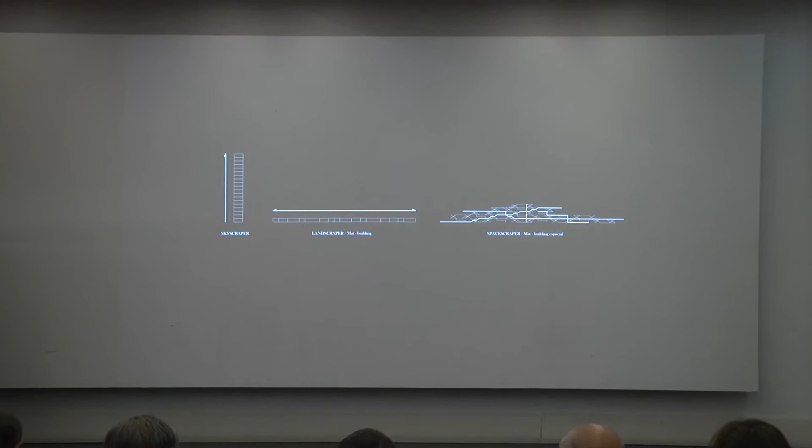But these patterns work only in one level, so how could we translate this concept, taking advantage of the 3 dimensions of space? The most important thing is relations, and it is the system itself which determines the rules of the game. The interconnections are multiplied, and the speed of mobility improved. The project is a research about this typology, a spatial mat building. Its base is a unique piece capable of generating the whole system, and which encloses all growing possibilities. As in a system, it is necessary to define the rules that allow its development.

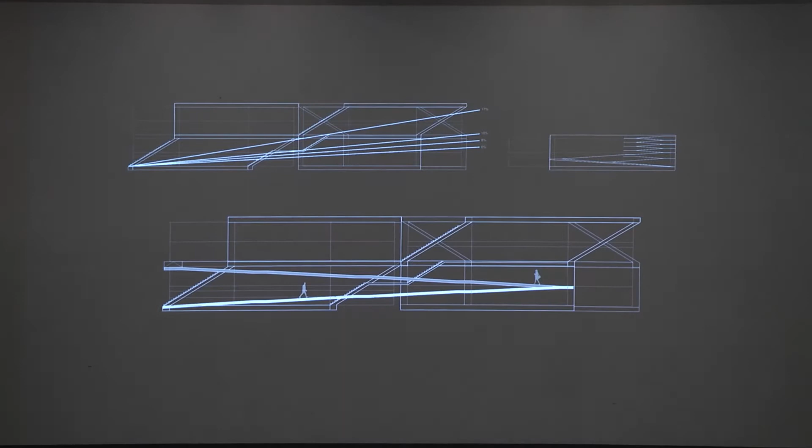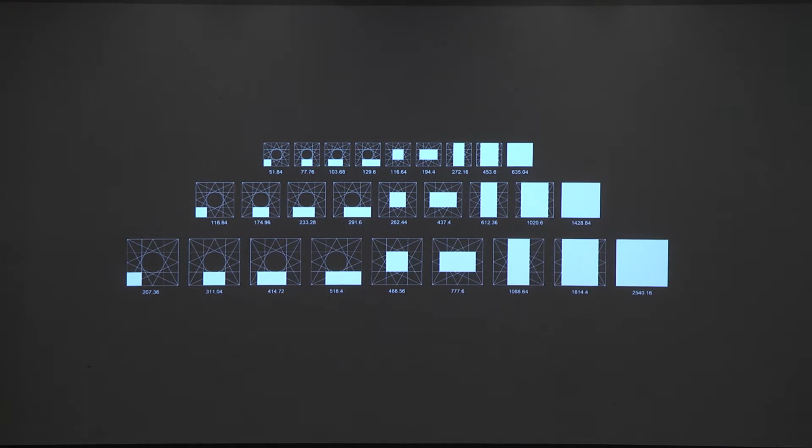So I studied and learned about aggregations, about geometry and patterns and superpositions. I learned about light and shadows, about dimensions and proportions, about the connections between 2 consecutive spaces, slopes, and accessibility for anyone, the possible scales, and the occupation areas, which are adaptable for any kind of program. But all these aspects merge in the final spatial system. But of course, it has to be something we can build.

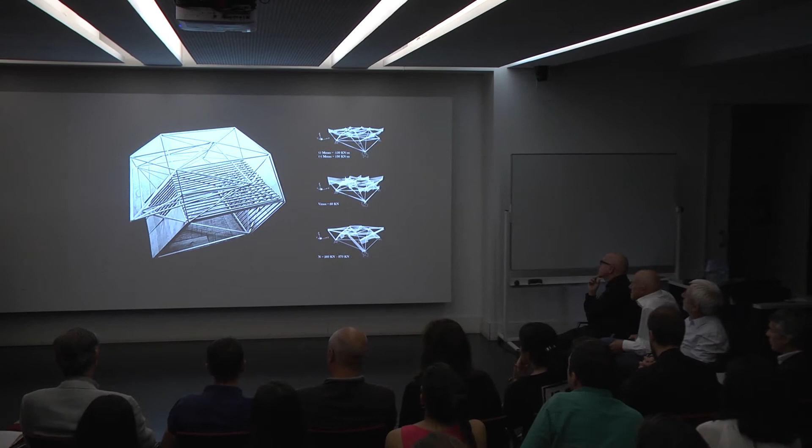The structure and the entire materialization is made of empty steel walls. Each point is tied in the 3 dimensions, in at least 3 different directions, making the set completely stable. The section of the beams is adaptable to any distance and load, maintaining the proportions because of the geometry. The building process is designed to guarantee stability along every phase of construction. And we can use the steel as a transmitter and emitter of thermal energy by heated water and sun, reducing the number of machines, installations, and the energy resources needed.

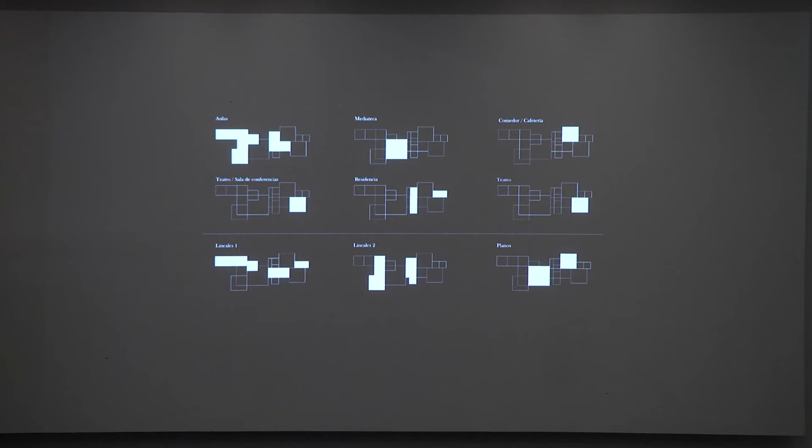And going back to Hunstanton, the project is located in the same plot as the Smithdon High School of Alison and Peter Smithson. It maintains the open space in front of the school, while creating a new shape in the landscape. The university campus is based on constant exchanges of information, and there are many ways of communicating it, very linked to arts and architecture. So we have, for example, paintings, photographs, musical pieces, and of course plans, models, or even a presentation.

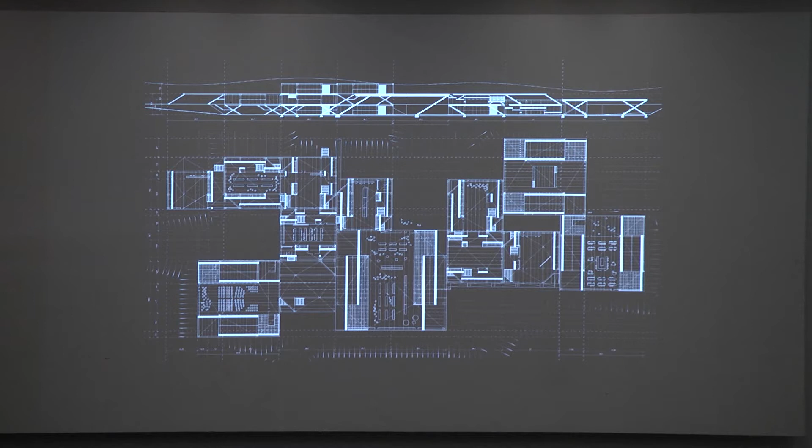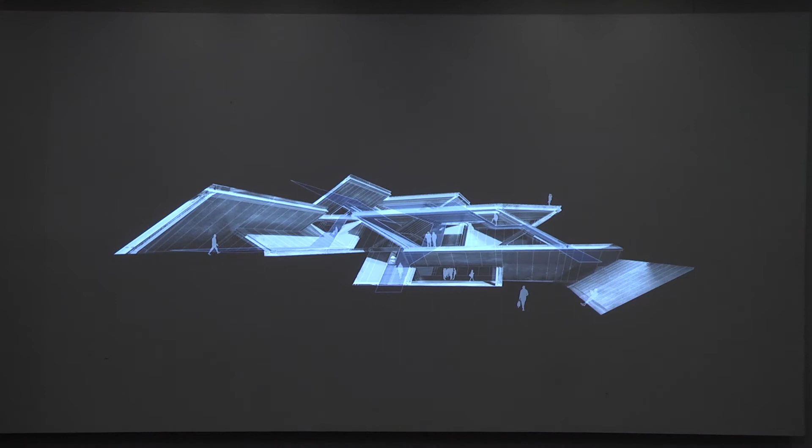But how is this space lived? Very simple. It is about translating those exchanges of information to the space it occupies. So, for example, according to the system itself, there are many ways to move around this space. You can do it linearly, and you will get linear information. Then you will be in a conference or in a professor's lesson or reading a book in a library.

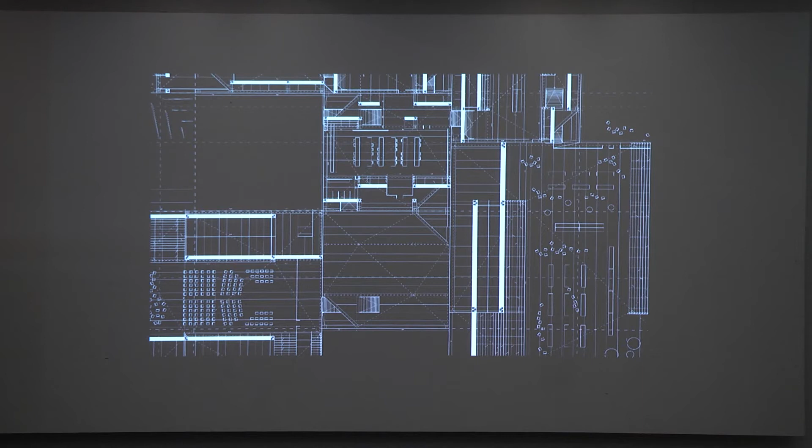Also, there are spaces with many possible directions, and they serve as singular points of reference within the set. So there, you will be in a discussion, in a workshop with colleagues, or in a media library, receiving information from many ways. But you're free. You're free to go around in any direction. So the type of information that you get, it's up to you. You are the one who connects those different programs and spaces according to your own interests.

The environment is green, infinite, and extends up the hills, and the versatility of the system allows meeting the many requirements of the program at the same time that it maintains the horizontality of the surroundings, so it accompanies the silhouette of the hills. It respects the height and the scale of the Smithsons' school, becoming a part of the landscape. Thank you very much.

I feel very self-conscious seeing something for a few minutes and then responding to it. I think it's fantastic, really, hugely impressive. I love the way that it's a new way of looking at movement, and the movement really generating the spaces and the whole three-dimensionality of that.

If I had the opportunity perhaps for a more intimate exchange one-to-one, I'd comment that I enjoy very much the way that the staircases and the kind of auditoria share a similar geometry. I'd love to know how a ramp system, for example, might interweave into that, so that in parallel you address the whole disability thing without use of elevators, without use of lifts.

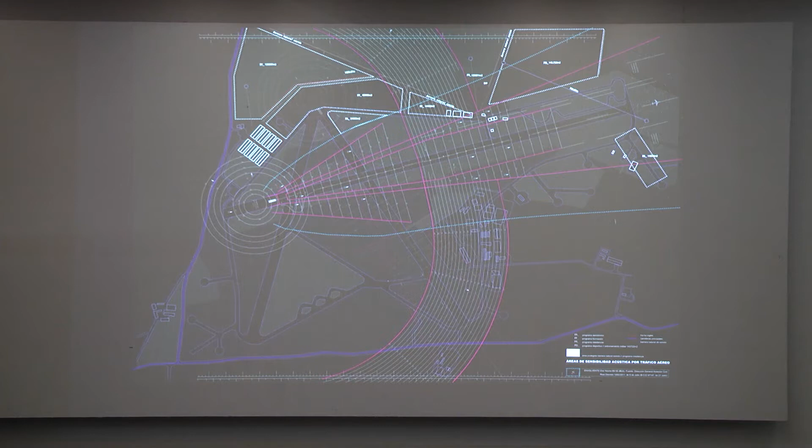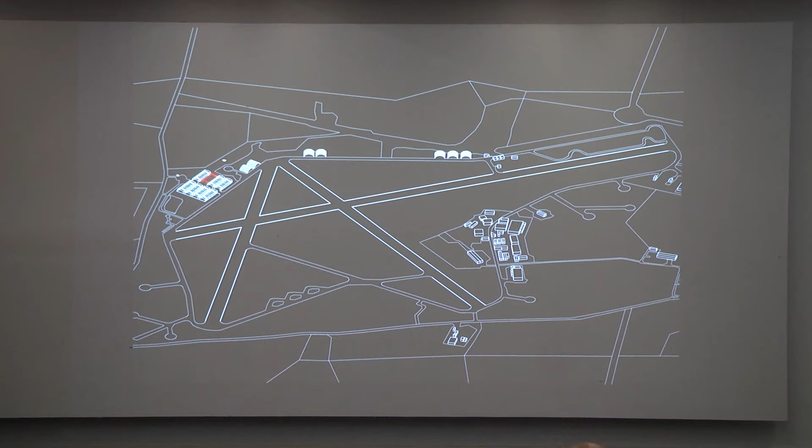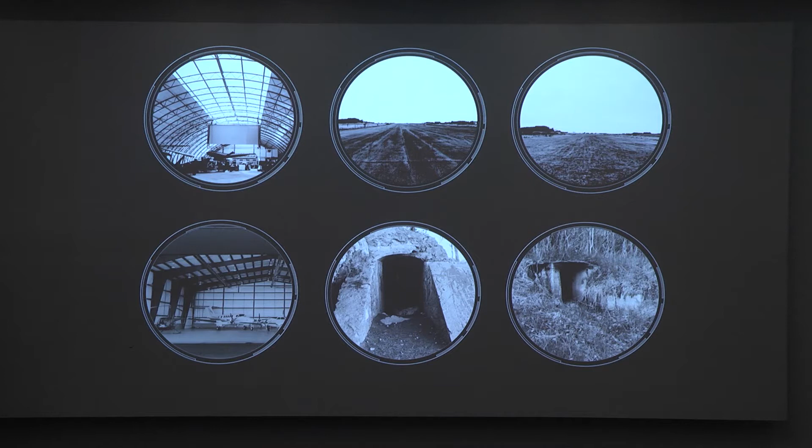The aerodrome, in its current state, is organized around three airstrips. In the western edge, we find 8 hangars of metallic structure, distributed in a row, and 2 entrances to some old bunkers. These pre-existing structures are completed with another type of hangar, located along the access road. The dimension of the airstrips gives a character to the landscape, being especially attractive the simultaneous existence of 2 so different types of construction, the hangar and the bunkers, that generate a strong contrast.

I made the decision to limit my intervention in the West precisely because of the coexistence of these 2 typologies. One of the naves cannot be used for its state of ruin, and that's why I decided to do without it. In the first hangar, located in the west, a camping area is established, followed by a zone for training and sport use. Close to the runways, there are the drone training and control tower.

In front of it, a mechanical workshop hangar. Looking to its left, a hangar for teaching use. In the footprint of the hangar in ruins, a meeting area, and to its left, a hangar for logistics and administration. Underground, the 2 entrances of the pre-existing bunkers are connected, and a rack and data storage rooms are established. In addition, 4 new entrances are created in the hangars with greater influx of people.

There is a double strategy when addressing the materialization of the project. The first of them is a minor order system that connects to the porticos of the pre-existing hangars, a system of catalog scaffolding that provides flexibility and a possible reorganization in time, adapting to the changing necessities of a military program.

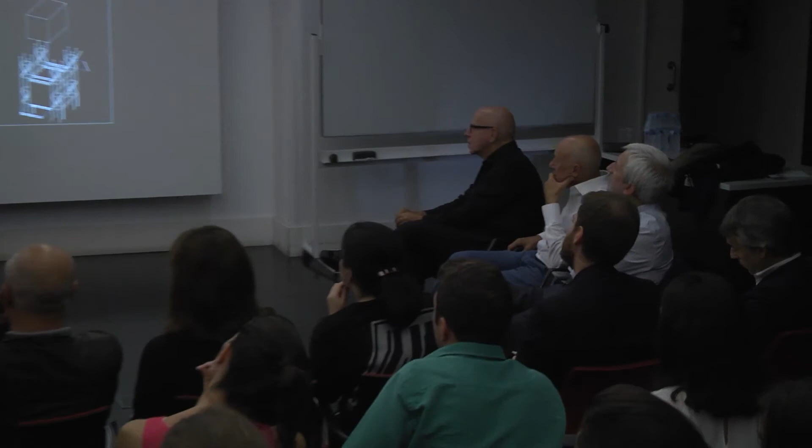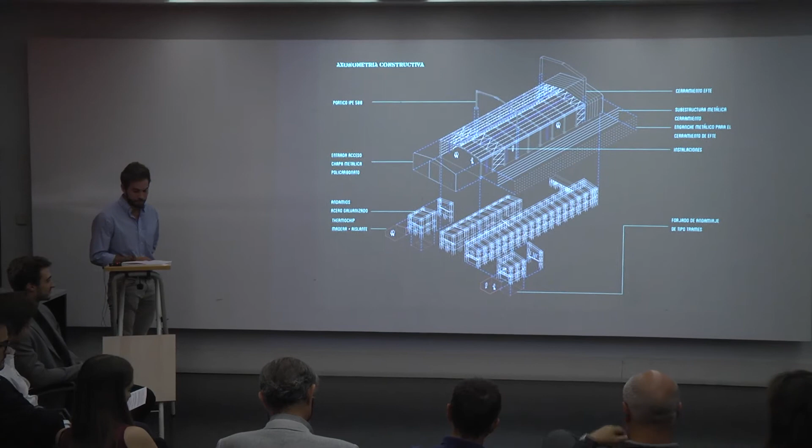The second strategy focuses on the resolution of the underground bunkers by very thick concrete vaults, necessary as a shelter in case of emergency. Each one of these elements is constructively defined. The system, which could seem repetitive, allows the communication between programs. The combination of the pre-existing hangars together with the new system generates an attractive composition.

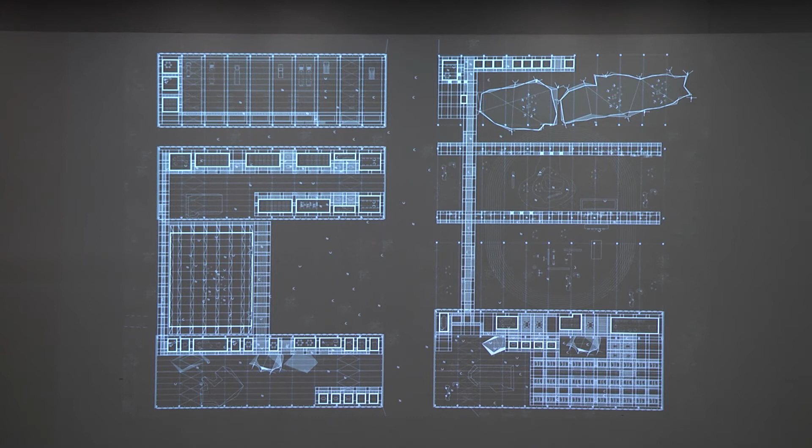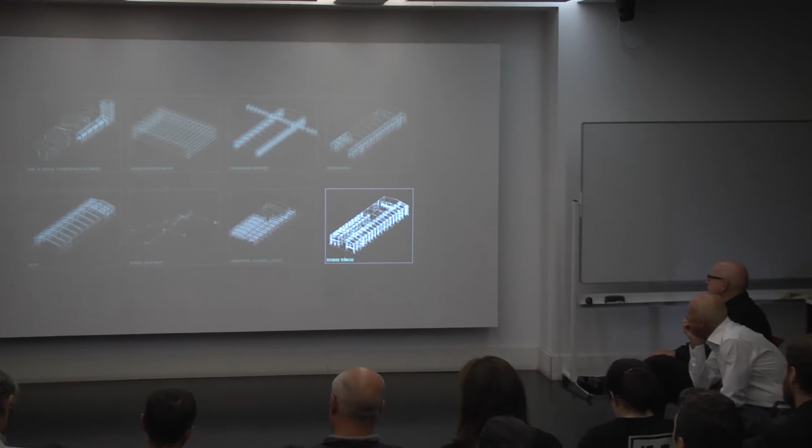In the drone training area, I introduced a self-constructed system consisting of tensors and micro-perforated meshes. In the teaching area, some prefabricated wood volumes are introduced, adapting to the system of scaffolding. They provide a central gallery. In the camp hangar, the residential use is simplified to bunk beds due to its military character.

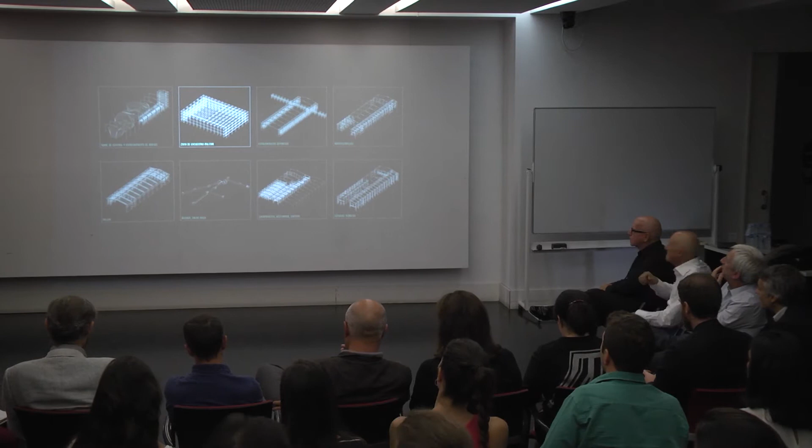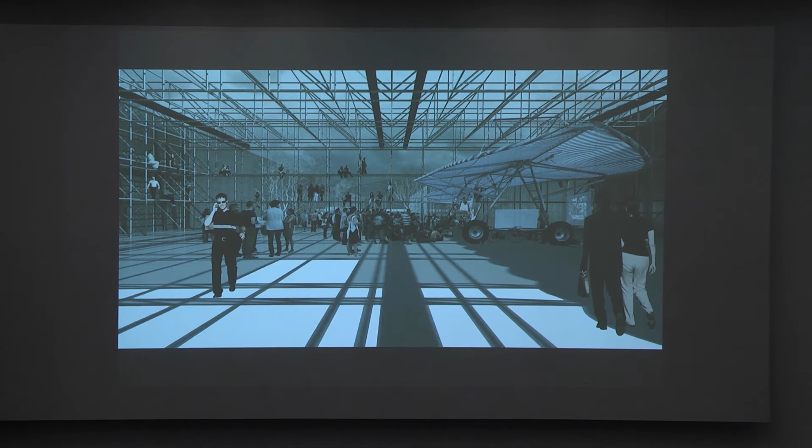Up to this point, all the spans saved by the scaffolds were previously known because they were cataloged. Here, the structural challenge appears. I decided to design a large common space. I needed to save a 25 meters span using the same scaffolding system. I studied how and where the system had to be reinforced, providing a solution that could host a place for events and conferences.

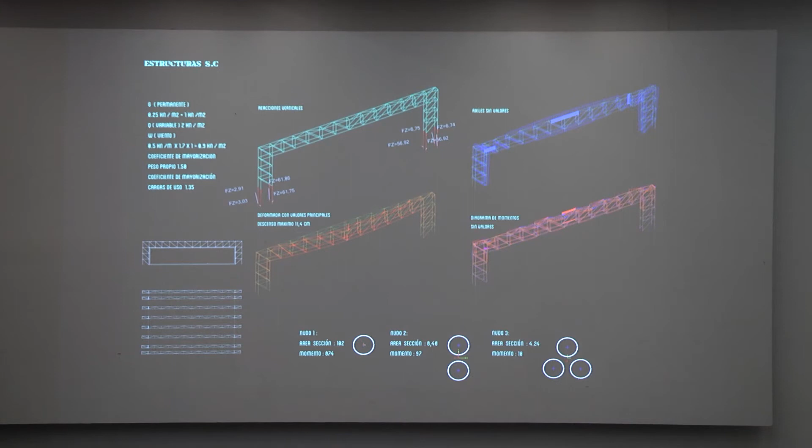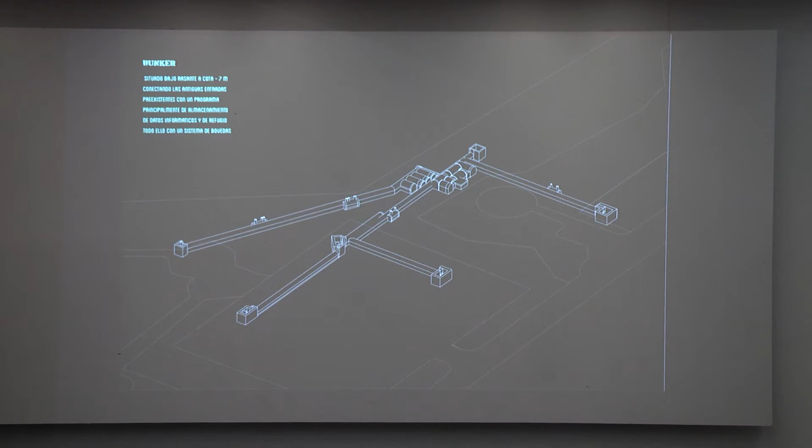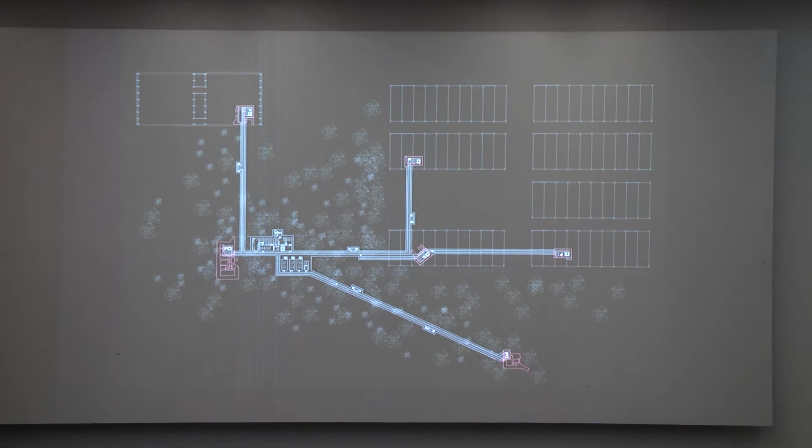Finally, the underground construction. The two pre-existing bunker entrances are connected, and the structure now protects a refuge and a data storage room. Another 4 new accesses are also strategically located. The two pre-existing accesses are hidden among the vegetation, recovering the purpose for which they were designed. The other 4 are located in areas where the largest number of people are concentrated, achieving a rapid and agile response for shelter in case of emergency.

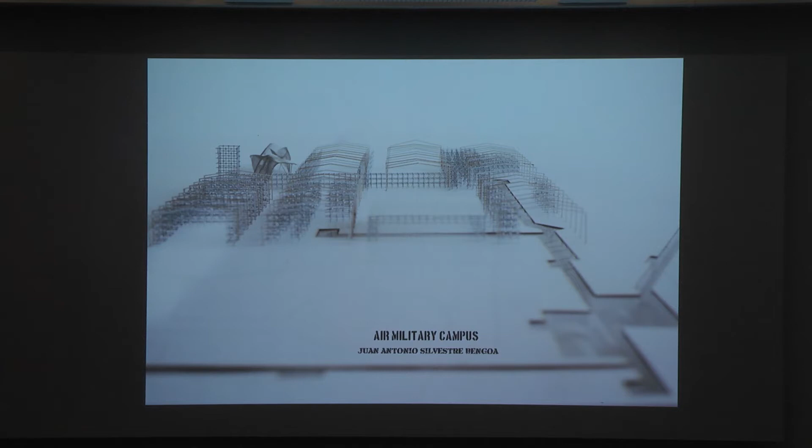An architectural project that started from personal interest and that is able to detect the appropriate place to carry those interests out, and together with the technique manages to materialize an idea. Thank you very much.

I don't think I need a microphone in there. Well, it's for the... Really? Oh, okay. All right. It's not for the audience.

As you know, I have a love of aviation, and I think military airfields, especially abandoned airfields, have an extraordinary kind of impregnation and layers of history. So I enjoy very much the way in which you engage with the heritage aspects of a base to transform that into a new kind of military education complex, which is very much against fashion.

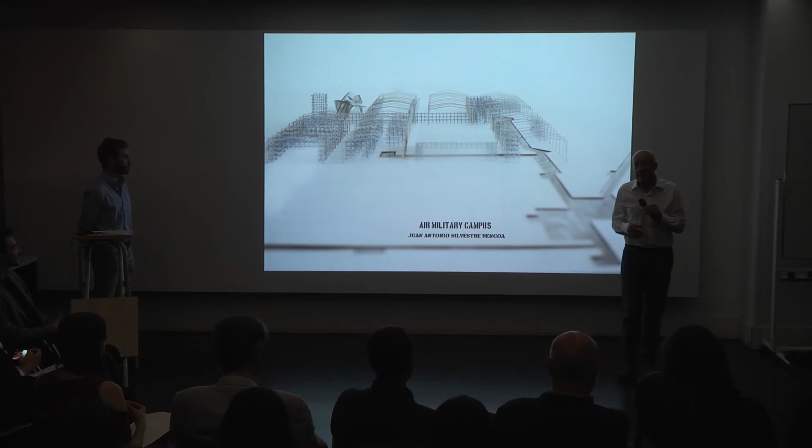But I think it's an inspiring synergy of the old and the new, and how you've been inspired in terms of the new structures by the kind of anonymous architecture of hangars and the reuse of bunkers. I think it's a super scheme, so congratulations. Really enjoyed it.

We're going to move to the center of London. We're going to see 2 exercises in a row. Sonia and Ricardo. Good morning. My name is Sonia Prieto, and it's a pleasure to be here. My project is in London, Smithfield Market.

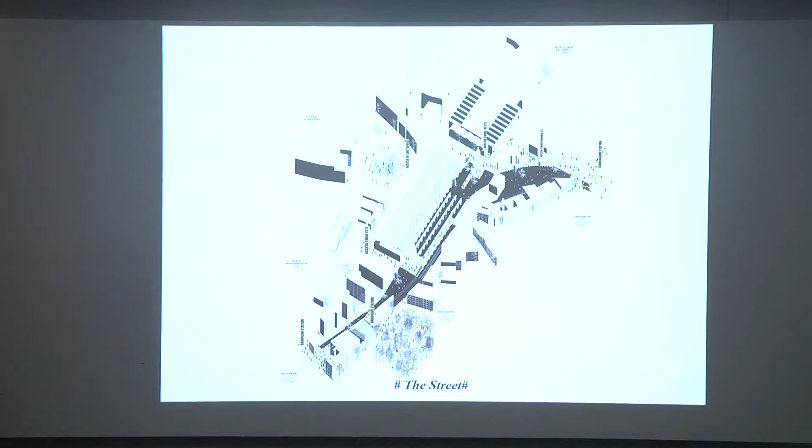In the middle of the City of London, Smithfield Market is an opportunity to convert the university into a way to make city. We got used to hide infrastructures deep underground, making a disconnected, dark and restricted urban world. This project proposed the opposite solution, taking advantage of this place, designing the campus as an infrastructure in London, allowing it to connect to the city and revealing underground architecture.

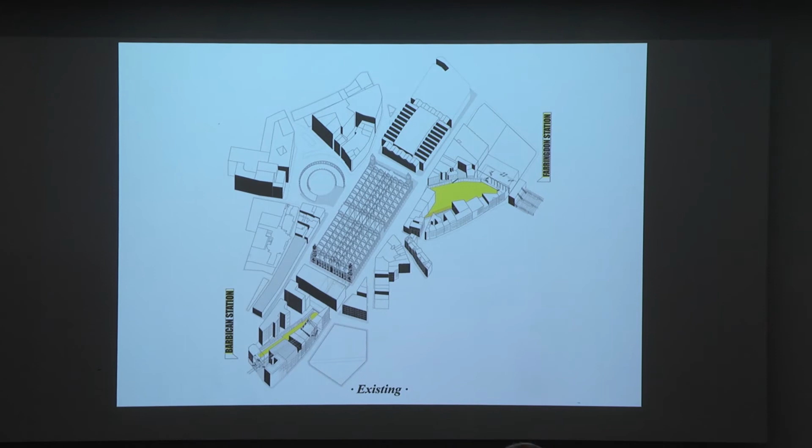The project starts with the location of Barbican and Farringdon Station, both open cast and so close to the market that the railways cross its basement. Beams from the North Street are eliminated, disclosing big retaining walls, brick arcades, past century barrel vaults, and the punctual and rhythmic trains that create new public space at the university, the street campus.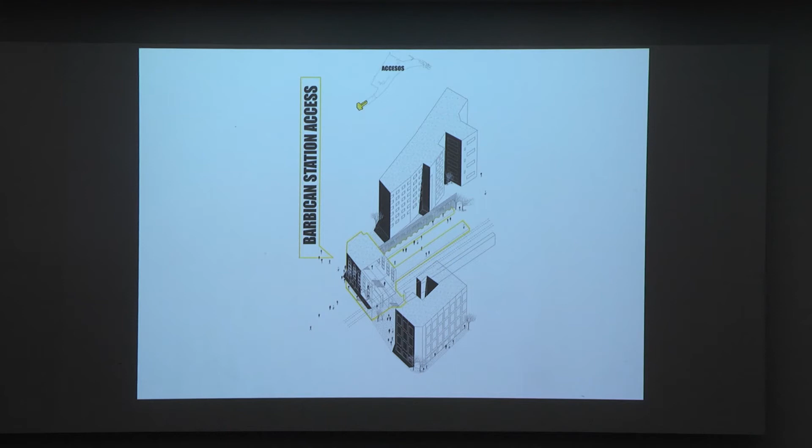The big street operation will be articulated by some accesses to connect the capital with the new level, 8 meters lower, with existing structure and a small urban intervention. The Barbican station is the first access, using the out-of-operation platforms, and with a new footbridge to cross to the pedestrian way. Near to the building, the old towers that have been released will be used to create two other accesses through two walkways.

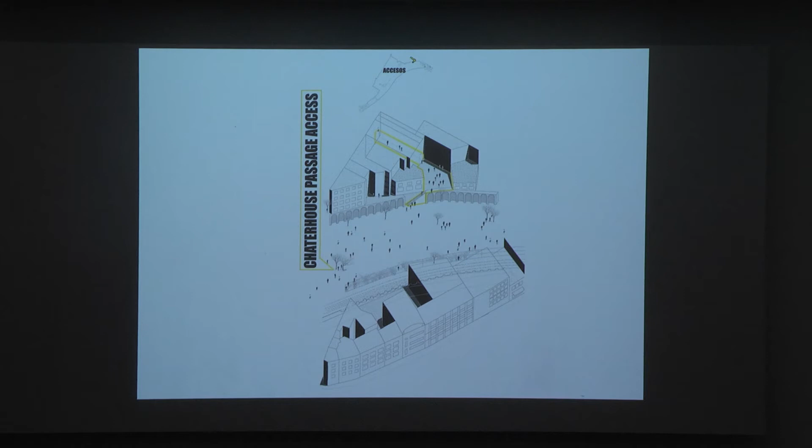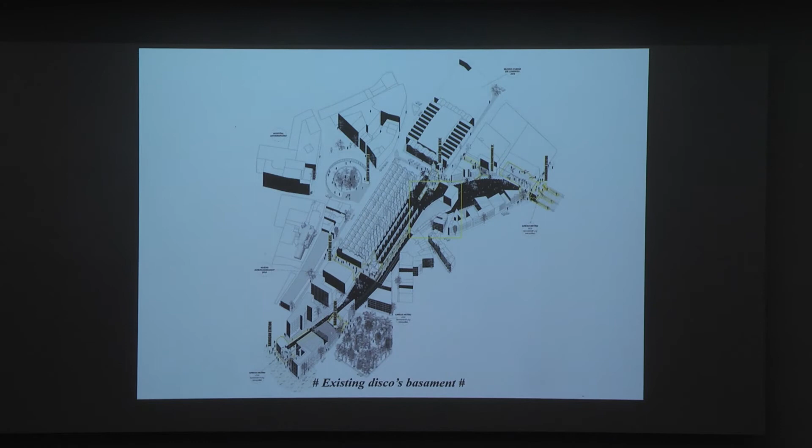On the other side, a passage connects the main street with the backyards that will be transformed into a big point with pedestrian access to the new street. Finally, Farringdon Station has another access. From this new street, you can access the cafeteria in the old disco basement and the university that transformed the old market by some structural operation. The basement level is the main entrance. All spaces are now connected.

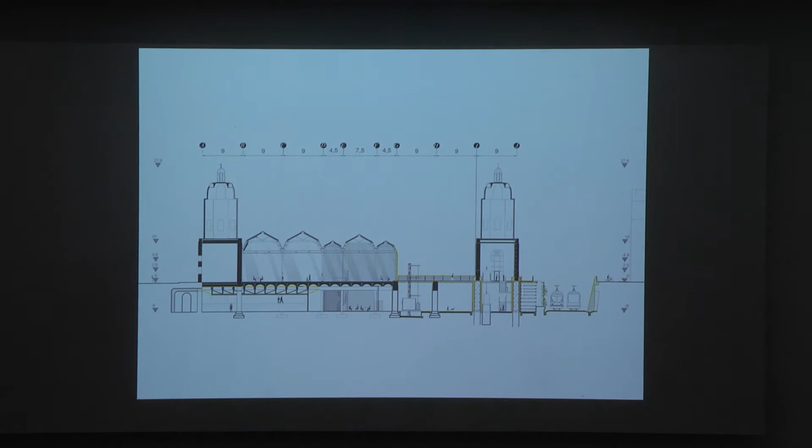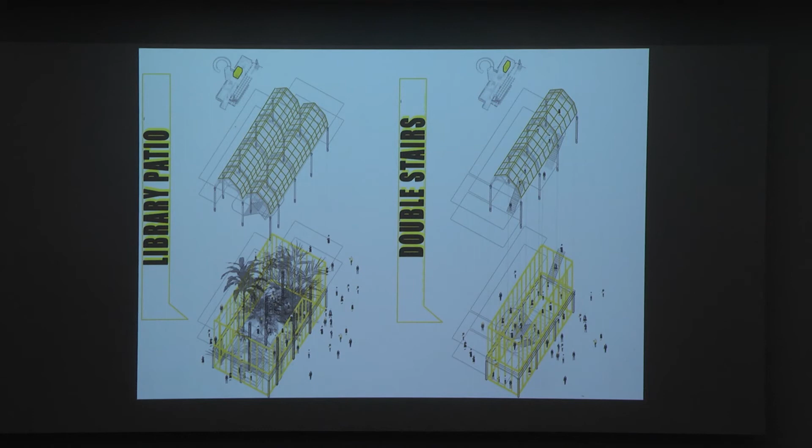This is the old situation, and this is the project, connecting trains, street, and indoor space. The public uses are there, and they connect with the classrooms and student housing. The whole operation was thought of as an infrastructure, from the access to the facilities, considering technical and urban aspects, in a similar way to other nearby projects, like the Barbican Centre or the Millennium Bridge with the Tate Modern, all assembled and built in the City of London. Thank you very much.

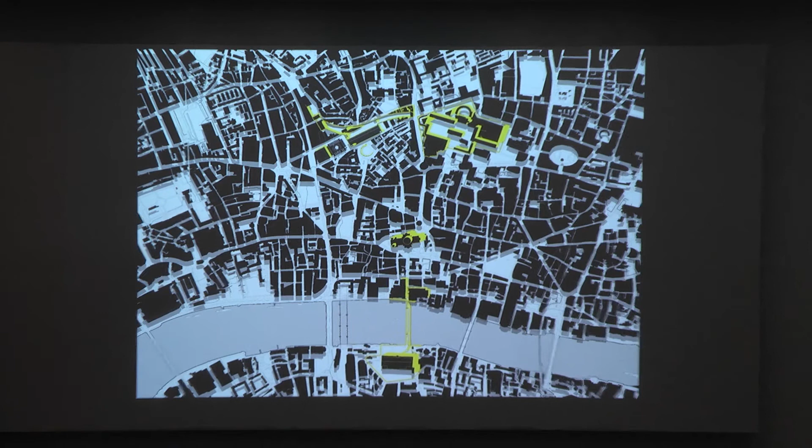We have another project in the same plot. Do you want me to wait till? Yeah.

My project is also in the Smithfield Market, and it's a quite different project. And the second one.

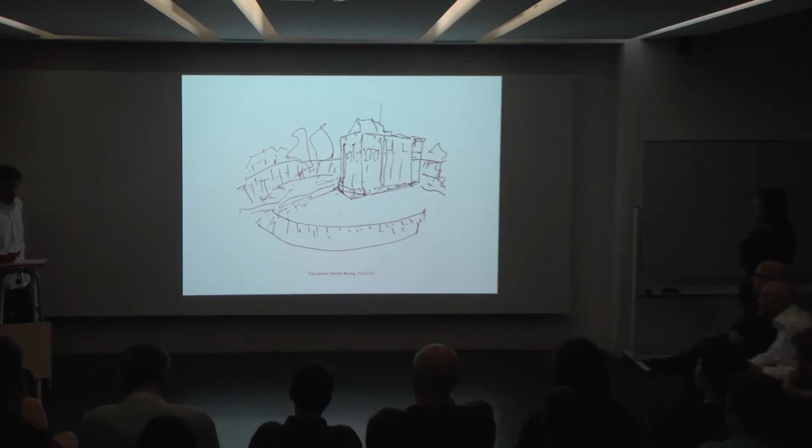My name is Ricardo Fernández. I'm also in the Smithfield Market. I'm going to introduce you Smithfield Abbey Campus. The ring, the abbey, and the monumental character shown in some of my drawings were three basic concepts applied to my project. They came to my mind after the visit to London and surroundings. They constantly provoked the quest for the massive and sincere, relying on brick as the predominant material.

Smithfield Abbey Campus is defined as a constant quest of a personal experience through an image that was determined by a sequence of spaces traveled, an image determined by the contrast between the traditional and the contemporary, that has to do with condition and evolution, with the space and ultimately with time, a time that is defined by the memory of the lived and the experience of the past.

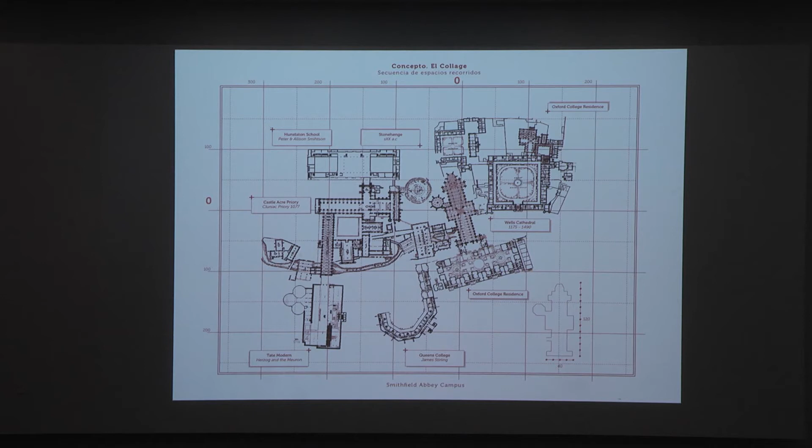A project that starts with experience, reaffirming the idea of projecting from the library, of the idea that we have in our head. Two memories in my head: a visit to the Roman Art Museum last year, designed by Rafael Moneo. Another big reference about the museum, the Kimbell Museum in Fort Worth, when I was in Texas in 2014, where I took the idea of the vault working as a beam.

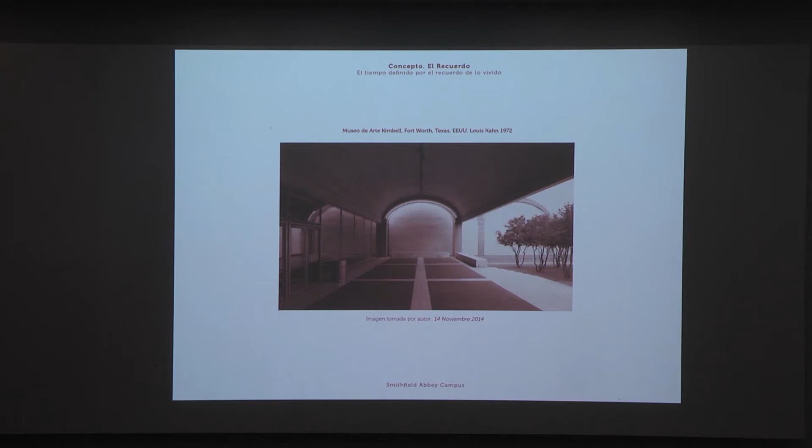At the end it is a project located in London, that you probably know better than me, but it's a personal London, a London that is defined by a path. The path that I took the first day during my trip. A path full of contrasts that define the situation of a project, starting in Soane's house, elaborate, at the same time confusing, going through the piece of the Smithfield Market and the old Victorian facade, brick and stone. The Barbican Centre as an example of mixed use. At different pieces like St. Bartholomew's Abbey, St. Paul's, the Bank of England, and finally, getting to the end at the space of Tate Modern.

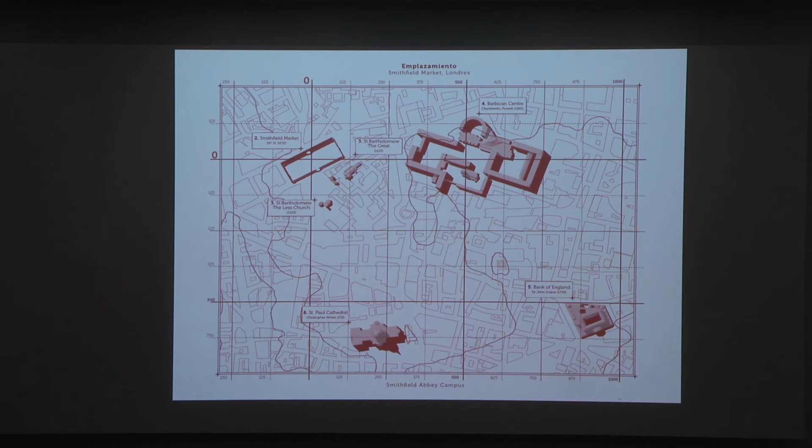At the end, the Smithfield campus is framed in an area defined by the Norman architecture of St. Bartholomew the Great and St. Bartholomew the Less, the Barbican Centre, St. Paul's, and the Bank of England, a piece that calls my attention, a piece that I drew and analyzed. And I understood it as a sequence of spaces, not only in floor plan but also in section.

A piece that was demolished in the 20s by real estate pressures, but was already represented in a state of ruin by the artist Gandy. A ruin that in England, without a past of ancient splendor like Rome and Greece, was used as an image, with literary content, and was incorporated into the poetics of the picturesque. The ruin suggests the passage of time and the nostalgia of the past.

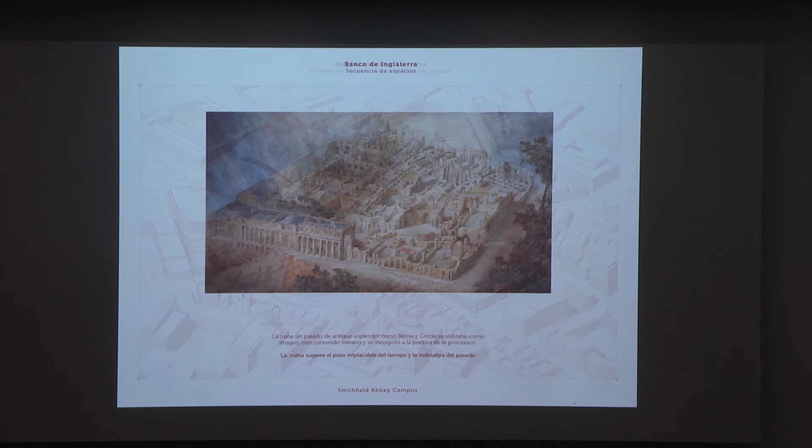Thus, Smithfield starts with the ruin and the reminiscence. The ruin of an ancient place that diverted the course of a river that flowed through a valley sloping toward the west. The ruin of the old Victorian facade of the Smithfield Market. The ruin of St. Bartholomew the Great and St. Bartholomew the Less. The ruin of a medieval square that became an entrance in recent years, and my project transformed it into the space for access to the most public program in the basement.

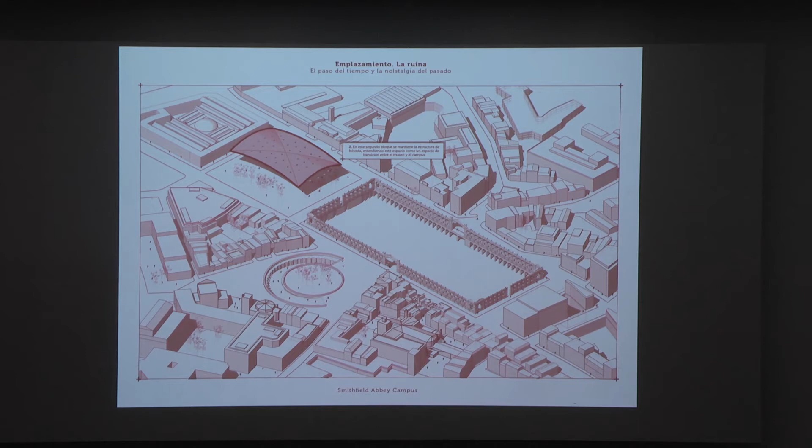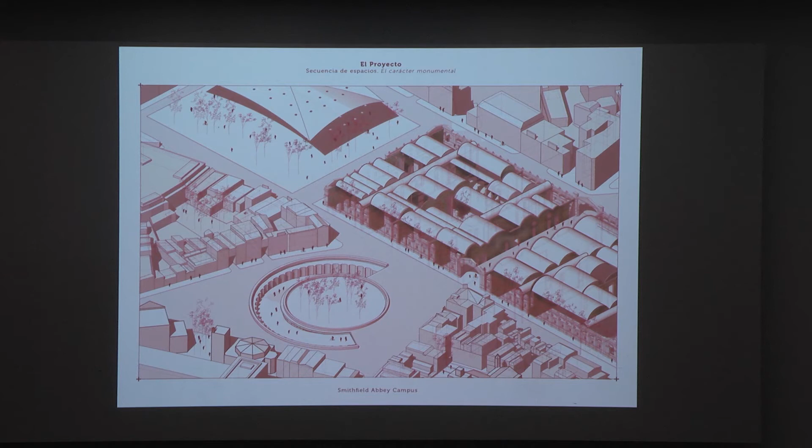The ruin of one of the most important long span structures that works as a piece of transition between the old Victorian facade and the Museum of London. Definitely it's a project of walls and vaults. True walls where structure and texture merge with the same purpose, the monumental character of the abbey. Walls that dialogue with the system of archways of the basement, a basement abandoned by the old train tracks. Brick walls that are supported with abutments, considering them an advantage and not a shortcoming. Abutments that are not hidden, and you can feel the monumental character inside.

This material sincerity also works in the vaults that are understood as beams, and that make reference to the concept investigated by Eduardo Torroja about reinforced concrete, and further developed by Eladio Dieste with the big long span reinforced brick structures. At the end, a service space covered by cylindrical vaults of reinforced brick, a technique from 1813 by Marc Brunel the engineer. Brick arches, concrete lintels, and narrow paths define the service space, a place where we will enjoy its wall condition, defined by the material sincerity.

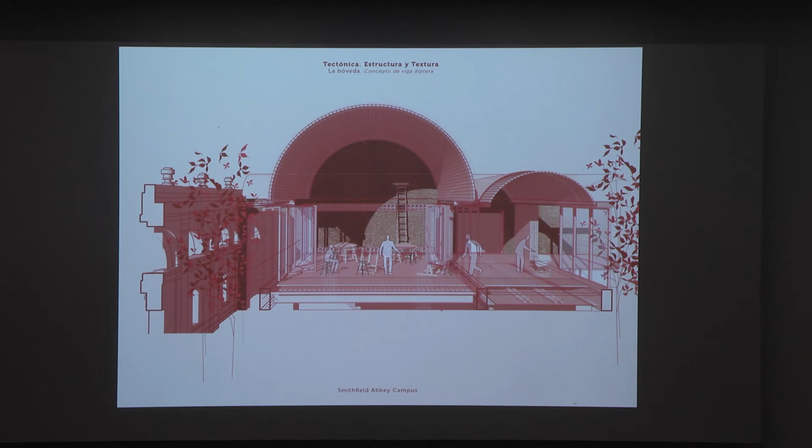A system that is faithful to material, double and triple heights, colonize the old Smithfield medieval square to become classrooms, courtyards, and workrooms. A sequence of spaces of a campus separated from the City of London by the limit of the old Victorian facade.

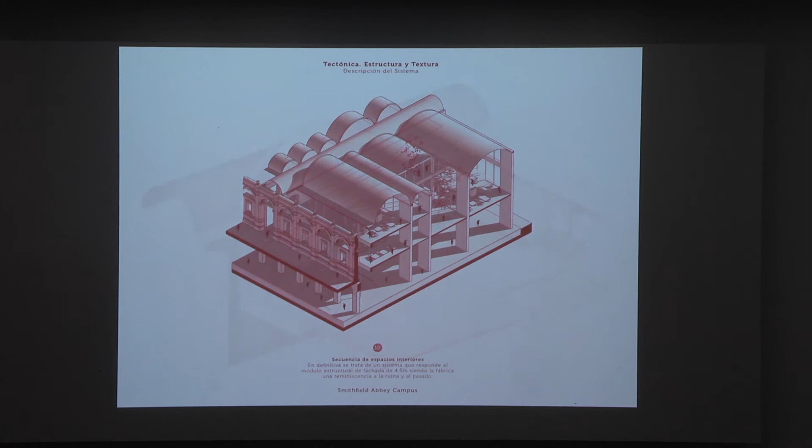Abutment, wall, and vault play a fundamental role. The vertical structure is composed of two sheets of brick, 1 foot each one, with an air chamber of 25 centimeters inside, allowing installation in between them. And a horizontal system of vaults working as a beam, with reinforced slabs and concrete beams. The buttresses are placed strategically perpendicular to the walls, allowing to brace the vertical structure and drawing virtue from its structural necessity.

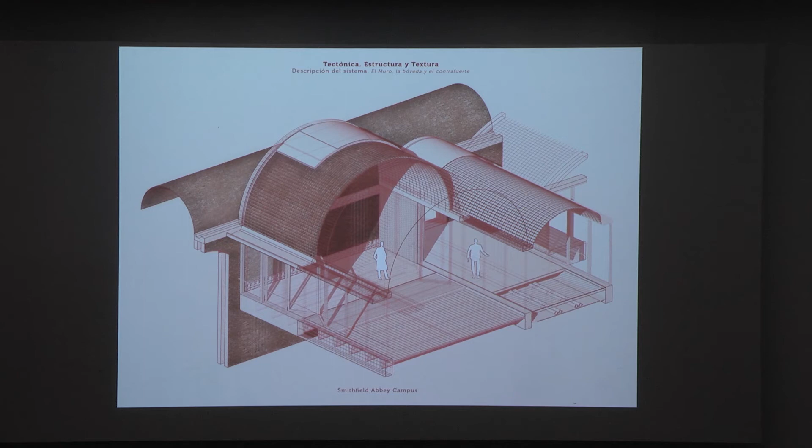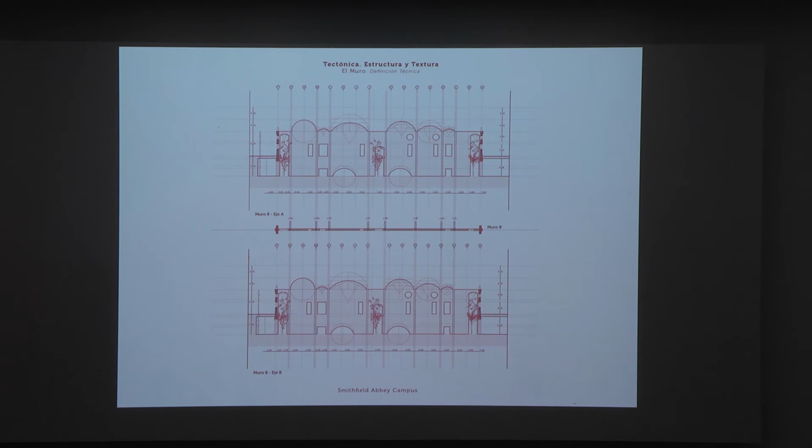I developed a total of 15 walls that run the floor plan of the old Smithfield campus, the old Smithfield Market. The abutment is defined in all its parts. An upper part where the supports are minimal, since the vault doesn't need supports, which allows drilling and plating with the bonding bricks.

A reinforced concrete beam is embedded in its interior. A beam that does not necessarily reach the end of the wall allows the train to be incorporated inside the abutment. The lower part corresponds to the basement, a more opaque basement, where the brick bonding plays again a new role, an important role, defining the different spaces.

At the end, I define a campus as a sequence of spaces between walls, the spaces that respond to the structural system of the facade. The east-west axis maintains the original visual of the market and generates a diagonal visual fade. Meanwhile, the north-south axis, released from the structure, generates a direct visual caused by the overlapping of vertical glass planes.

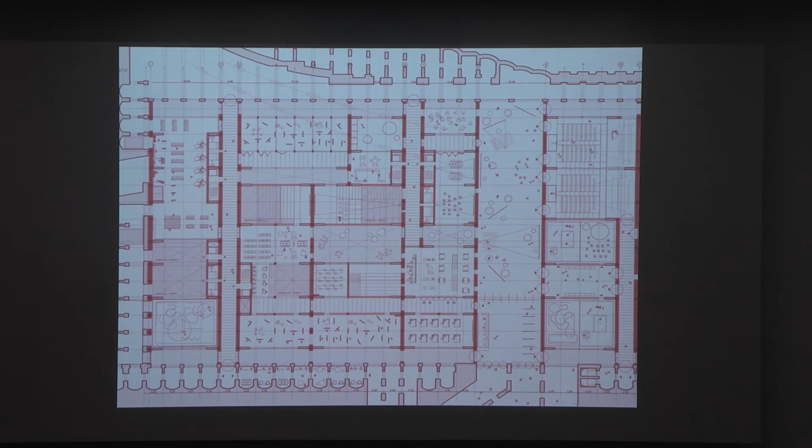A floor plan which, as well as the model, is a reminiscence of the initial image of the Bank of England. Please remember the collage and the different possibilities in which one of the multiple solutions of the system is drawn. The basement plan is similarly configured to house the most public spaces near the central axis.

At the end, Smithfield Abbey campus is a reminiscence of the archive and a view to the future, with the technique and the construction, and a journey to the origin and an exploration of the future.

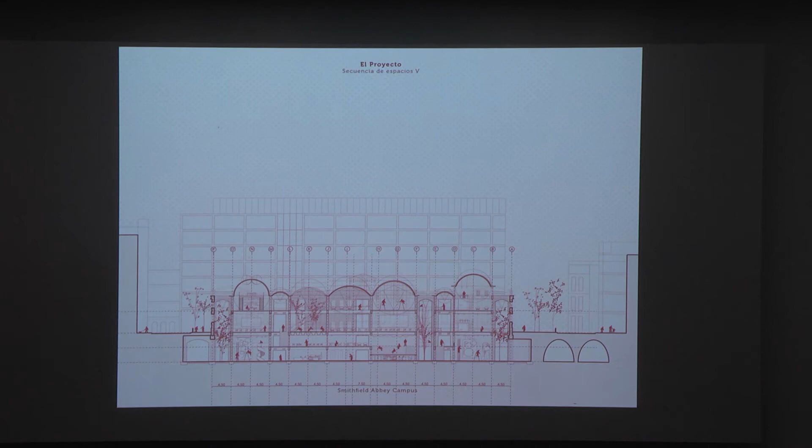So again, I think it's the extraordinary variety of projects, and I'm fascinated that London and the United Kingdom provide this kind of source of inspiration. We're very fortunate beneficiaries as a practice because, as you know, a huge proportion of Spanish architects, graduates, and so on. So, wonderful. Thank you.

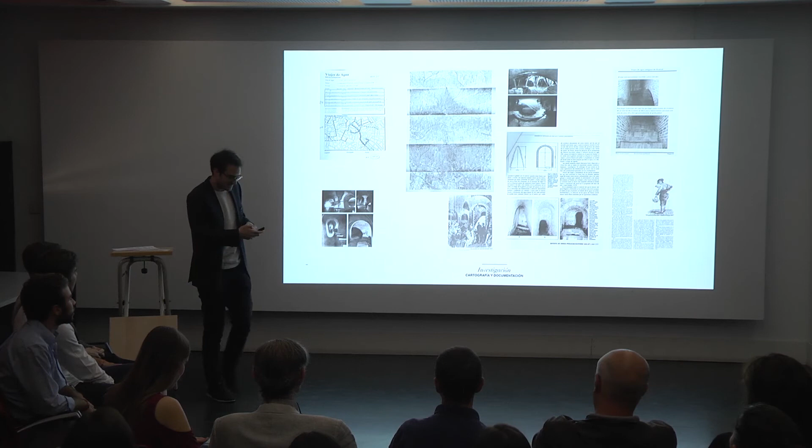We're moving to the last one, to Madrid, the more surreal and dark project by Julio. Yeah, I want to express my gratitude for giving me this opportunity.

Madrid has a net of underground existing galleries belonging to the medieval infrastructure of water supply. The project started with an intense research about all these different layers growing in the underground of Madrid. I decided to set up a plan of recovery of these existing galleries, that lost landscape, in order to recover and turn them into public space.

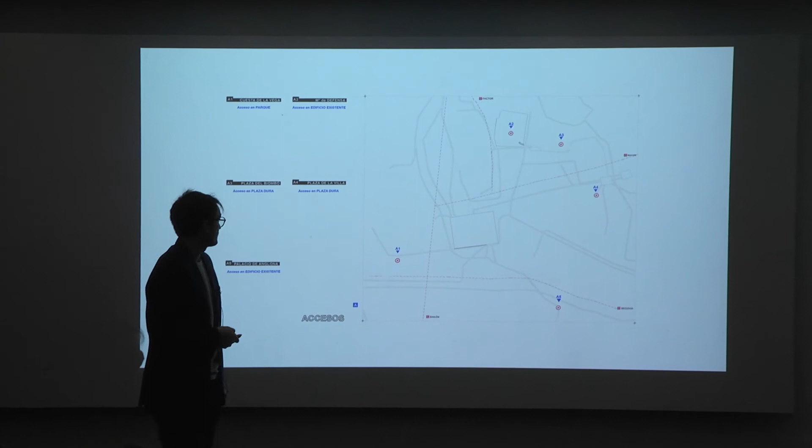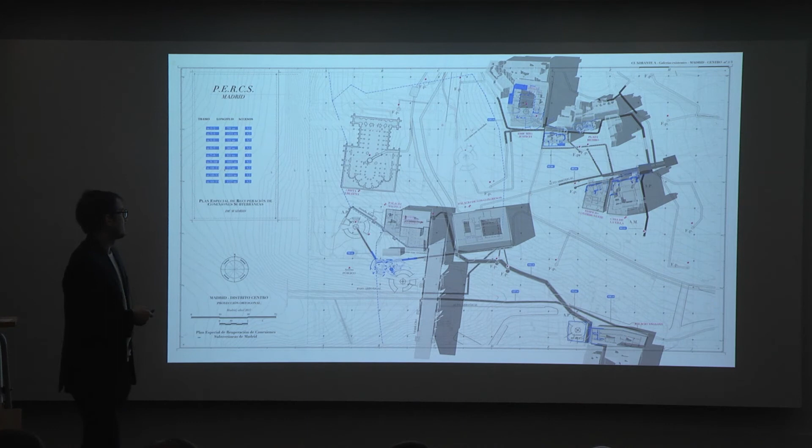So, operating over the existing galleries, I decided to set up 5 new axes, recovering part of the spaces and proposing new connections. So this is the main strategy of the plan, as you can see here, relating different parts of the city, of downtown Madrid, and different spaces that talk about the origin of the city. I'm going to talk about 3 of those axes, and each axis has its own typology and its own spatial and structural idea.

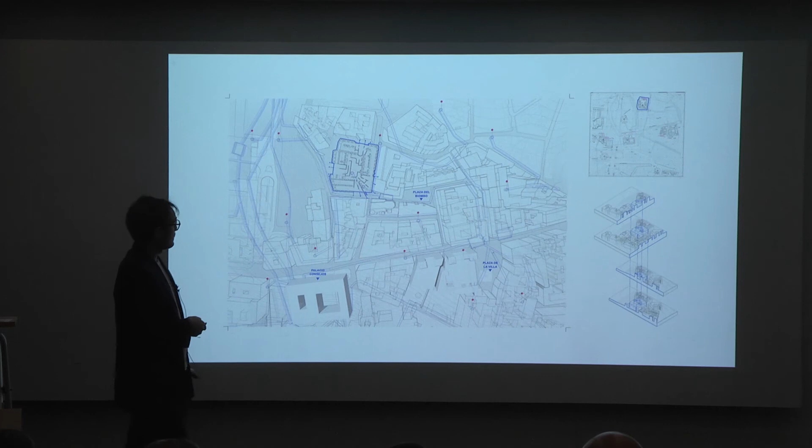The first axis will be developed in an abandoned building owned by the ministry, and it's a load-bearing wall building, and I decided to change the structure of those buildings and to turn them using an index of arcs. I use those arcs as a kind of diaphragm to transform the main plan and to connect the building with the existing galleries.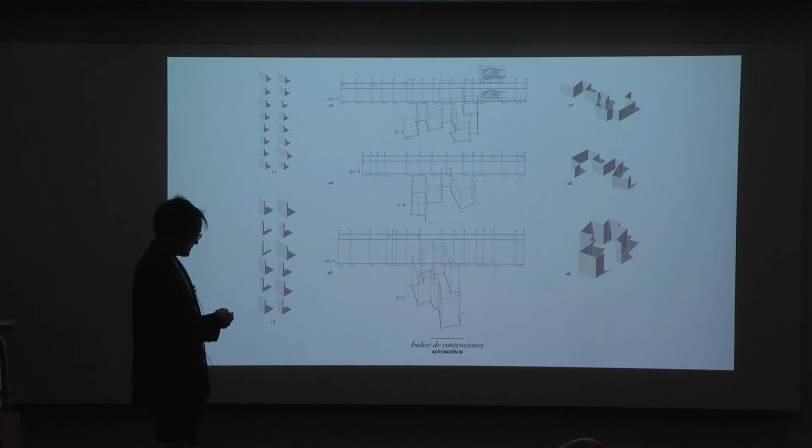The second axis will be developed in a plaza, in the square in downtown Madrid, also surrounded by these existing antique galleries. The main strategy here is to use folded retaining walls for 2 reasons. The first one is to connect the proposed open space with the existing galleries and also to contain the land.

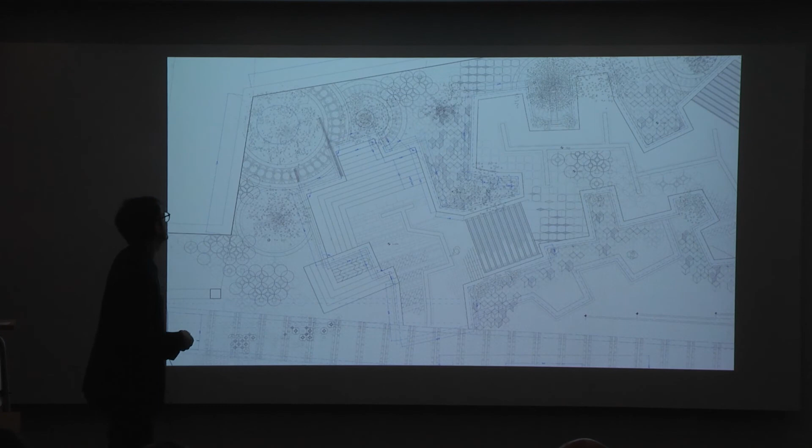Again, I thought also about the tiling plan and how to reach an interesting character for this space, and also to think about the materiality, the construction of all these retaining walls using brick pieces. The third axis I'm going to talk about is the access in Cuesta de la Vega, an antique space of runoff waters near the Almudena and the palace.

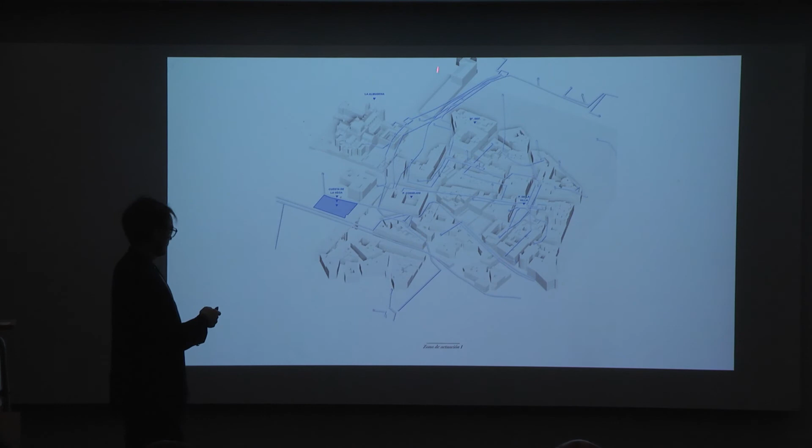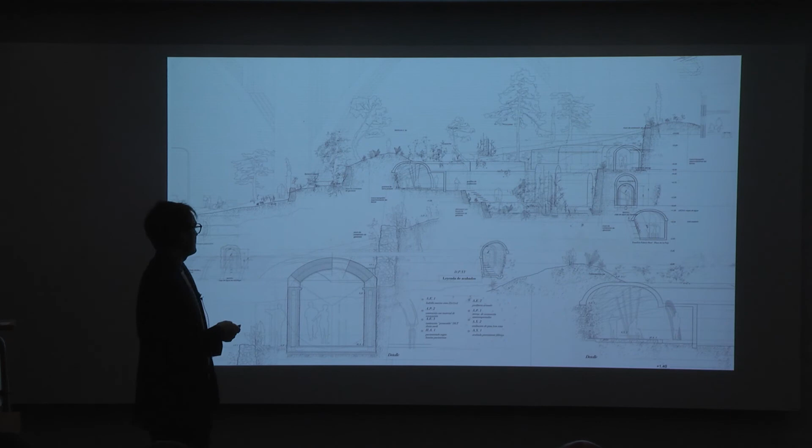And again, it's a space surrounded by all these existing spaces, and I decided to research about the existing geometries, the existing sets of the vaults, and I decided to use them to set the main section of this intervention. Again, it's a section that works in two ways. The first way is retaining the wall, the loads of the land, and also making a new connection with existing galleries and creating a new open space that is a public space. It's a kind of palimpsest where the new mixes with the old.

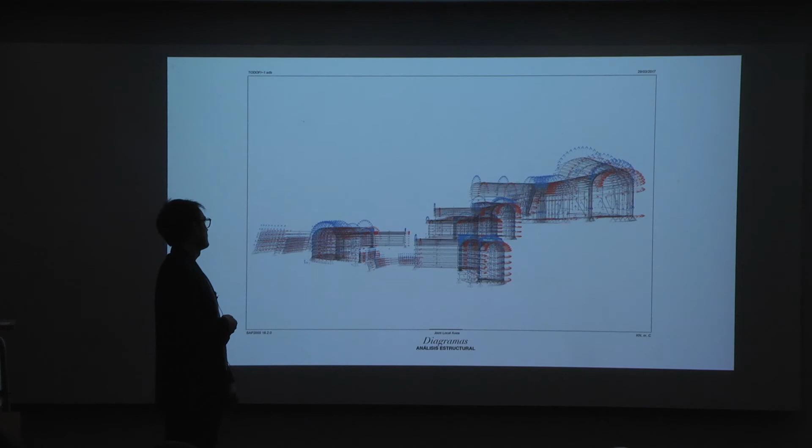Well, on the other hand, I truly believe that construction belongs to the epoch. So, as my project is talking about an ancient epoch, I decided to go to Rome to research about ancient techniques and to use these geometries in a new modern way, using technology to develop the final shape, the final thickness of the whole project, and the vaults, and the range of concrete inside the vaults. The same way, I think about the drawing of the elevations, the details of the brick pieces and clay pieces, and the character of all those constructive details.

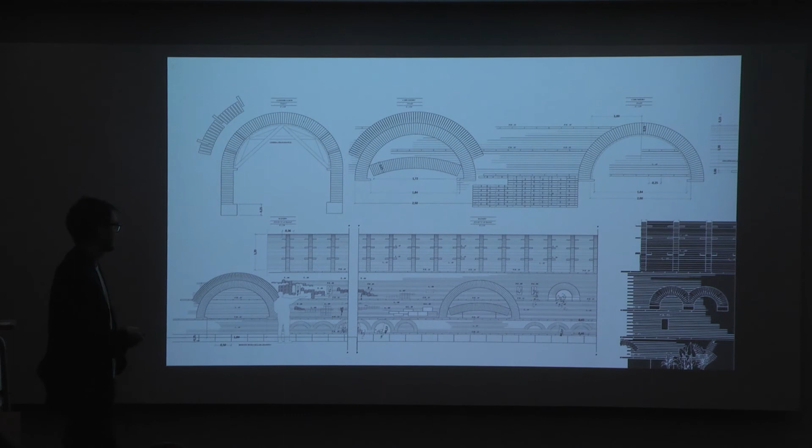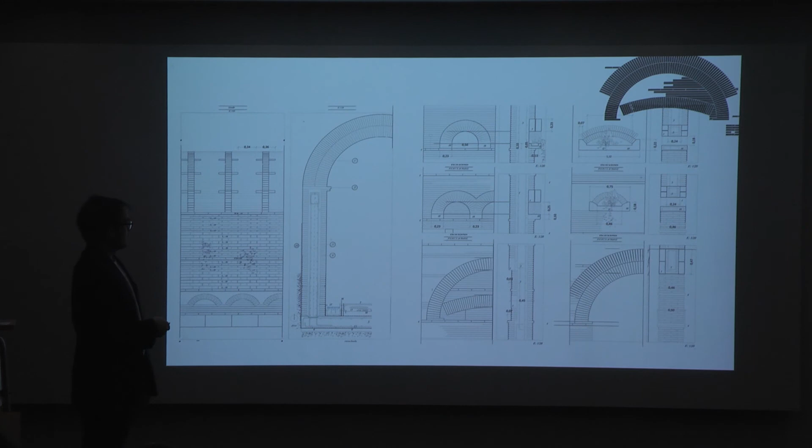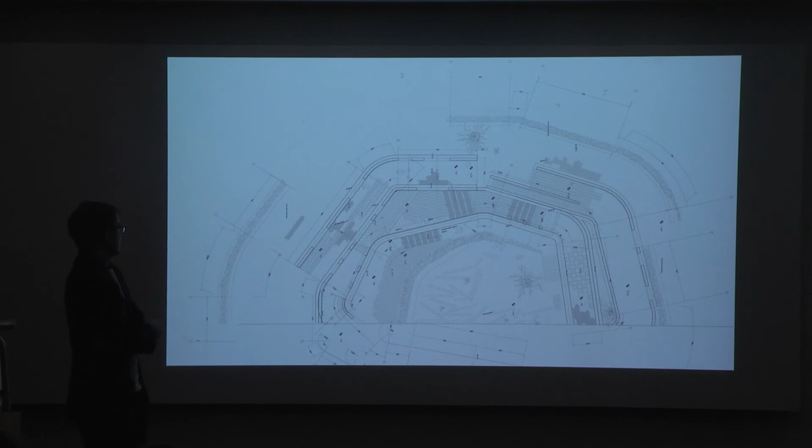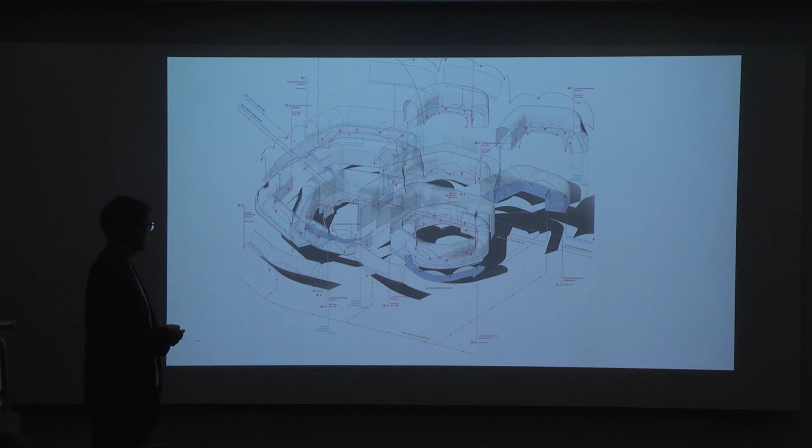I also developed this kind of anatomy drawings that talk about the way it is constructed, and again about the urban condition of all these spaces, how to develop the tiling plan and the character of all those spaces. It's important to talk not only about the technique, but about the technology. I refer to how to deal with the nets of electricity, illumination, water supply, and how to mix it with the background of the existing project. Finally, I'm going to show a video that talks again about the behavior, the atmosphere of all those spaces.